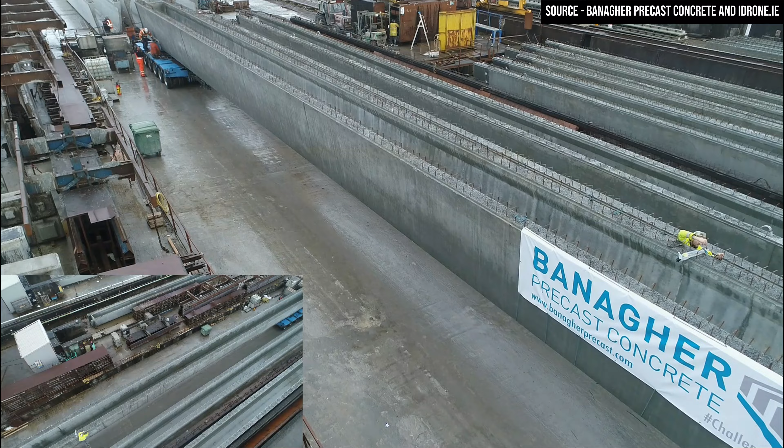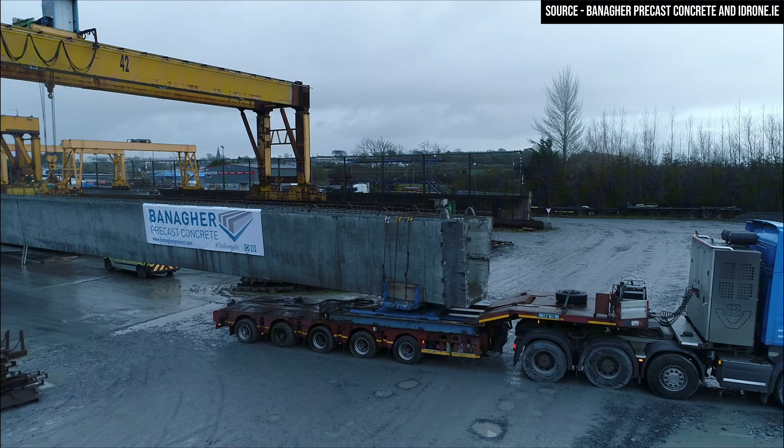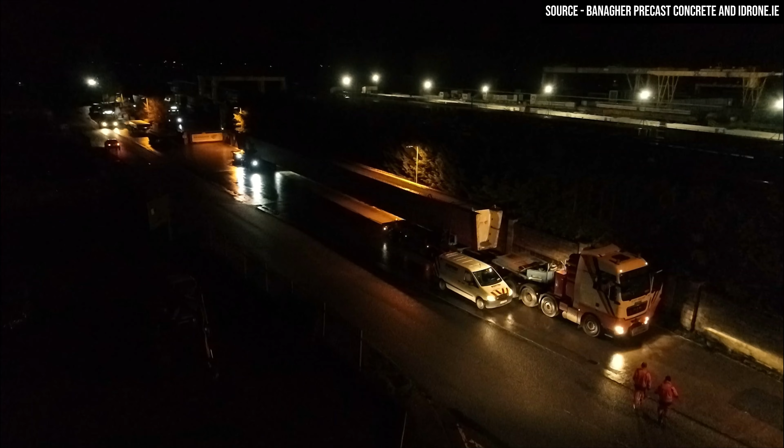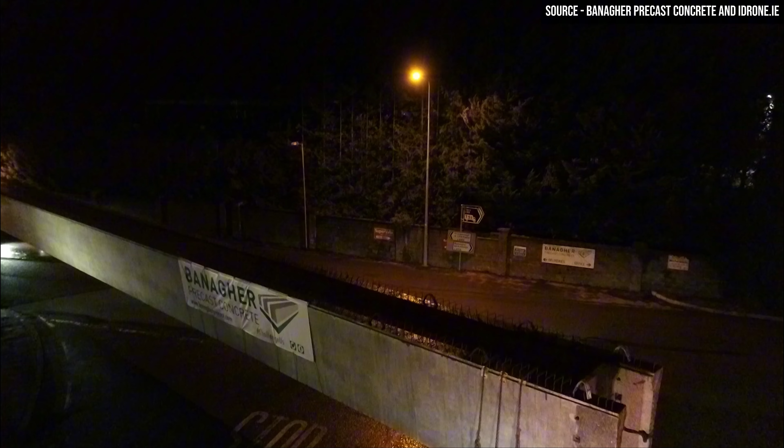We have Precast Concrete Design Lifting Course episode 3 for you. Just before that starts, I'm going to show you a nice little video that the guys in Banagher were very good to give me for this course, and iDrone.ie shot the footage. So it's of the record-breaking 50-meter long bridge beams, W19s, that Banagher manufactured for the N22 Macroom bypass. The beams were manufactured for Jons Civils and John Craddock's, and they were designed in combination with JB Barry.

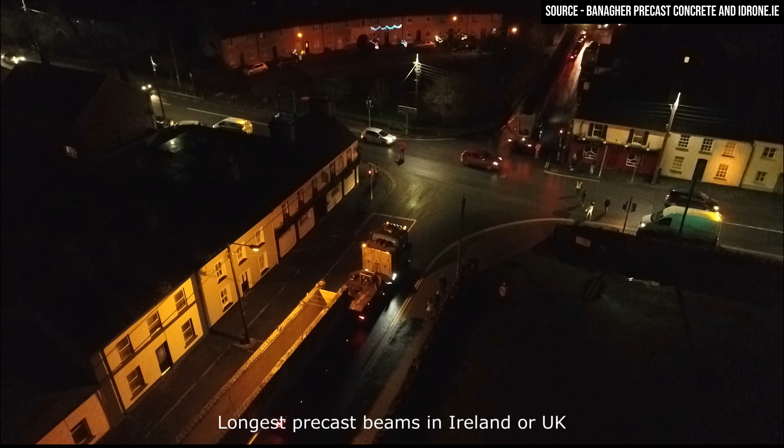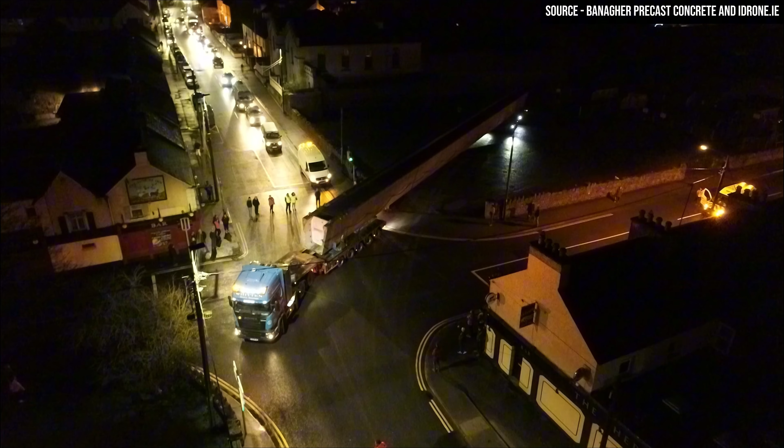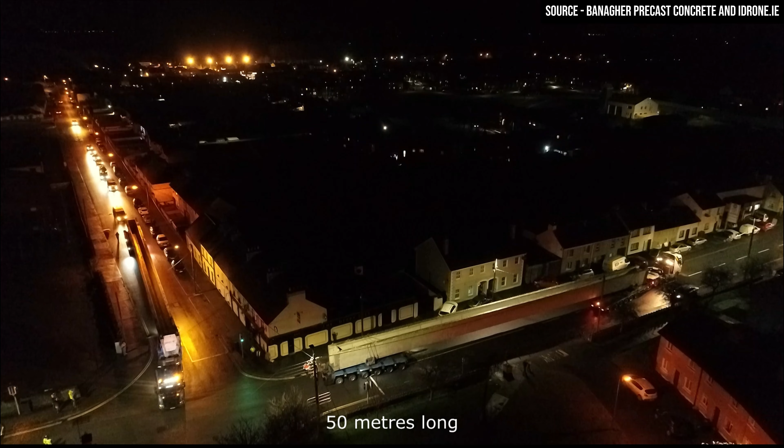They're a fantastic feat of engineering, to be fair. 50 metres long, 155 tonnes, 2.5 metres deep. There were 7 of them manufactured and installed, I think, over 2 days for this bridge. You can see here them coming up through the town of Birr, and whatever about the manufacturing of them, just the logistics and getting them to site. You can see from this footage, it's extraordinary stuff. I'm going to stop talking here and just let you watch it and enjoy it.

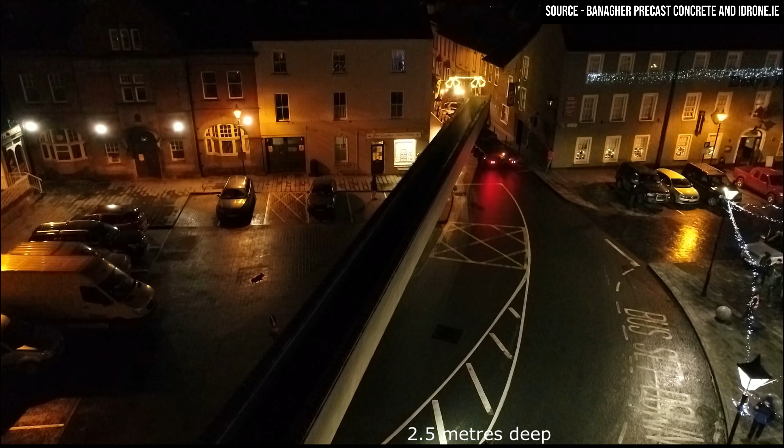So you can see here the beam just getting through Birr town, and I think the guys said that they're nearly maxed out with 50 metres, or else some of them houses, shops are going to have to come down. You can just see it squeezing through.

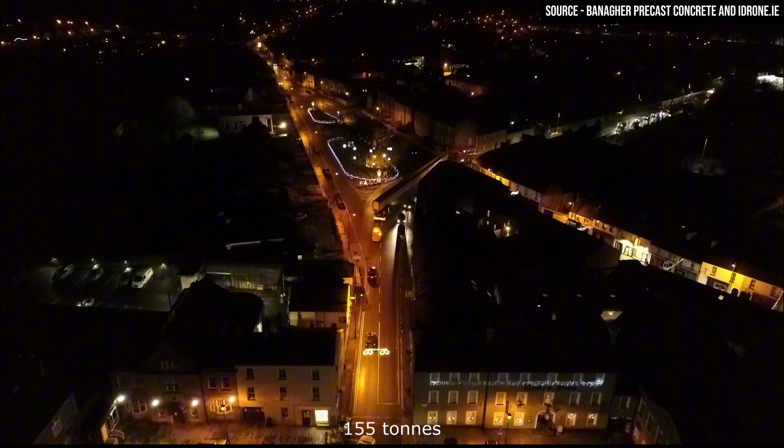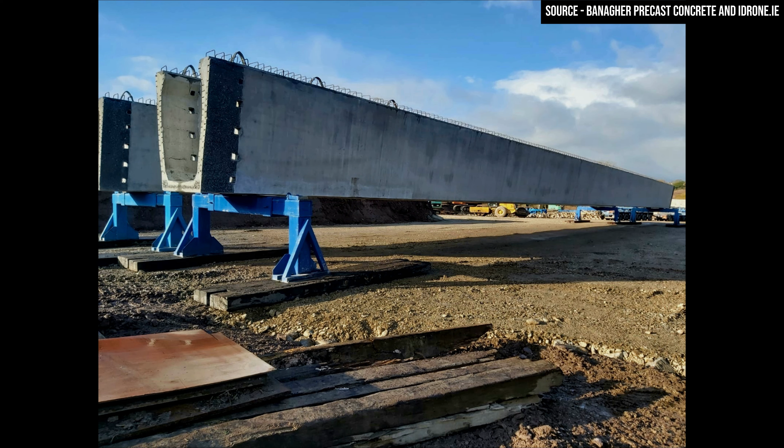So on site, you can see the beams were offloaded onto trestles, just saved on craneage. The beams could be brought down, left onto trestles, and then popped into place. The lifting itself is lifting strands, 8 number point lift. A couple of photos of the beams going in the finished bridge. Strand lifters will be discussed by Matt in next week's lecture, so one to stay tuned for.

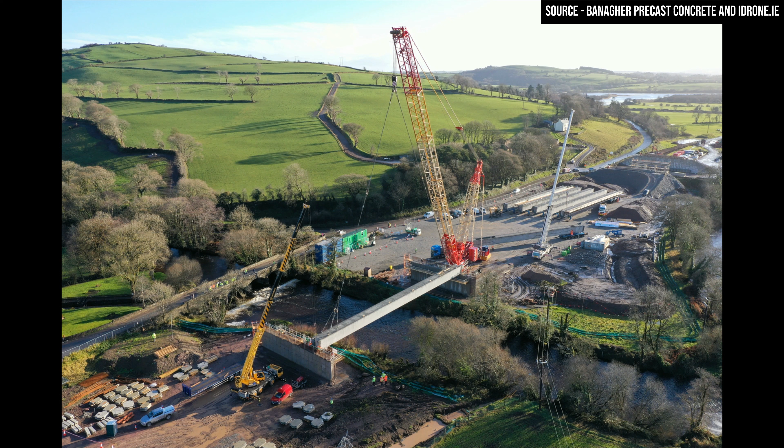So welcome to the third module, third lecture in this precast lifting course. In this module, we'll be continuing to focus on the lifting capacities and on determining the capacity of lifting pins due to shear. So last week we looked at the capacity of lifting pins due to tension, and the one before that we looked at calculating the demand. So this is probably on a par in terms of the technical side of things compared to last week. So lectures 2 and 3 are probably the most technical lectures in this course, and we're kind of at the crest of the hill here now, and the final 3 lectures are less technically intensive.

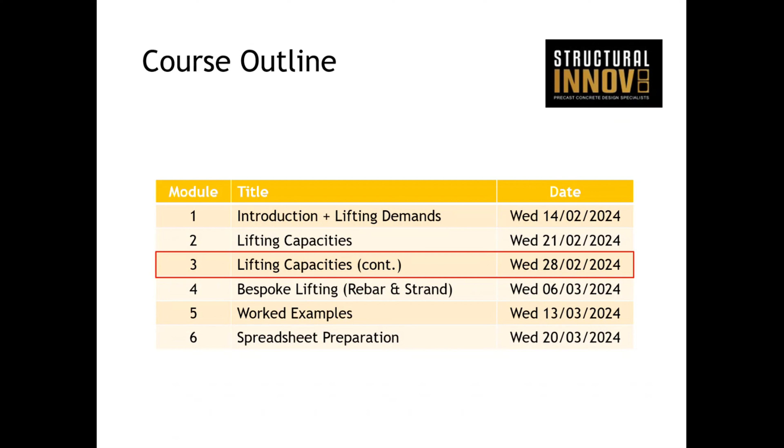Summary of the course outline. We're now moving on to the next module, which continues to focus on lifting capacities. Before getting into this, we'll have a quick recap, like we did the previous week, of last week's module, where we discussed the lifting capacities due to tension failure modes, and we'll have some questions at the end. So after our recap of last week's module, we'll continue with some technical discussions on lifting capacities in relation to shear this time. And then following that, I'll speak about how to account for situations where tension and shear act at the same time, and how to account for this interaction.

So typical slab lifting, for example, with your chain angles at 30 degrees, you're going to have tension forces and shear forces on your lifters, and the same piece of concrete is essentially trying to resist both sets of forces. So there's an interaction to be accounted for there. We'll finish up with looking at some supplementary reinforcement that you can use in order to help resist the tension and shear forces, and we'll follow that with a full worked example, basically continuing on from the simple slab that we started with in lecture 1. We'll now check that simple slab in terms of its capacity in tension and shear.

So last week we focused on capacities of lifters due to tension failure modes. We took the general capacity formula, broke it down into its individual components for each failure mode. And for steel failures, we showed that the rated capacity of the lifter that you typically find in the brochures is acceptable and complies with the approach taken by the Eurocode. There are 4 concrete failure modes in tension: concrete cone failure, concrete pull-out failure, blowout failure, and concrete splitting failure. The first 3 we kind of showed formulas with quite a number of factors in it. As I said, they're all fairly well explained in the slides and in the code itself.

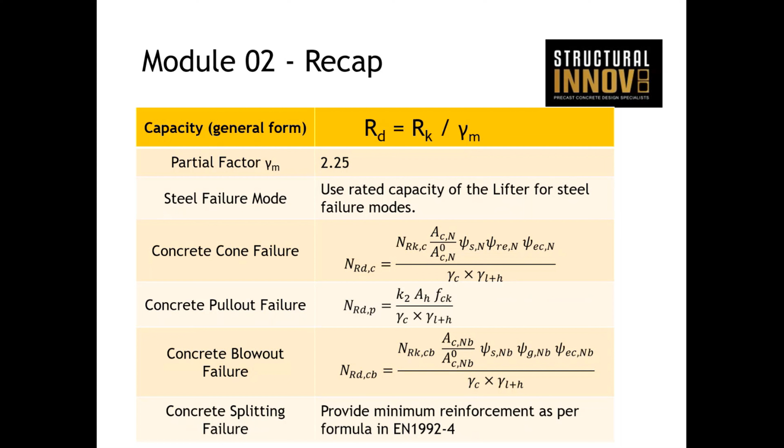And one question that was raised to me last week on that was the formula for splitting failure. So these next 2 slides are essentially from lecture 2 with an amendment. The formula for splitting failure is provided in the general Eurocode for fastenings in concrete 1992-4. And in terms of the partial safety factors, we need to ensure that when we're doing precast lifting, we include the precast lifting and handling safety factor from CEN 15728.

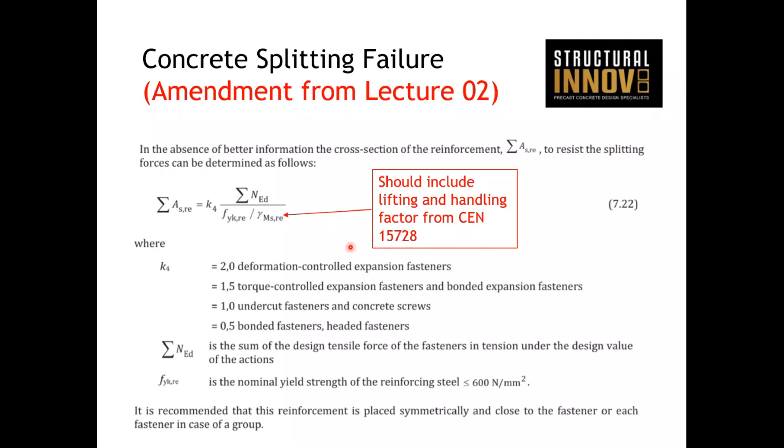Typically, the partial factor for reinforcing bar is 1.15. But then in addition to that, according to CEN 15728, we need to add in another factor, and for steel rebar, it's 1.8. And that essentially is to conform with the older way of designing with a global factor of safety of between 2.5 to 3. So the second slide then is a revision of the formula that we presented and the values.

So in this gamma SRE, that's your reinforcement partial material factor, and that has 2 components in terms of lifting design. It's got your 1.15 for the material, and you've got your 1.8 for the lifting and handling, and that gives you a total value of 2.07. So it increases the amount of steel required to resist splitting. And in this particular scenario, where we looked at a 32-ton lifter, the biggest in the range, you need 662 millimeters squared, which is the equivalent of about 6 B12s centered around the lifter uniformly.

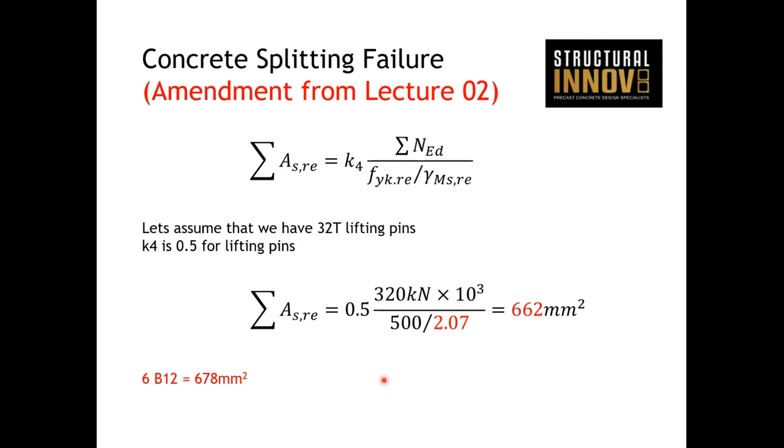So again, it's not a huge increase. Last week, I think we said we needed 4. Now it goes to 6. And this is for the biggest lifter in the catalog. So again, it's not a huge amount of reinforcement. Generally, if you're using the biggest lifter in the catalog, it's a big unit, which probably has a large amount of steel in there anyway, and you can rely on that steel for this check. So generally, this check is always going to be satisfied still.

In terms of lifting pins, I've just put the slide up again. I've showed this slide every week now. So again, we've got the forged foot that gets cast into the concrete. The foot is the primary load transfer mechanism for tension forces. And for the shear forces, which we're talking about this week, direct contact is typically made between the clutch in the dome and bears against the concrete there.

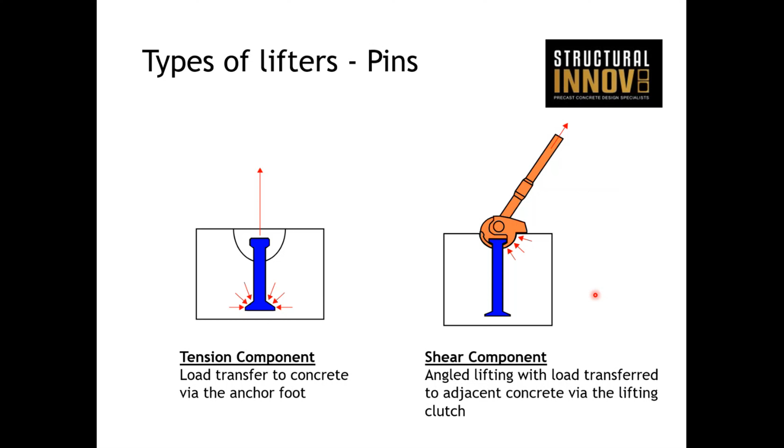It's probably quite difficult to theoretically put a number to exactly what's going on in this area. So we bring everything back to what the actual lifter is doing in terms of shear. So is the area of concrete in contact with the lifter sufficient? Is the steel section of the lifter sufficient? And that approach is applicable to all types of lifting components in shear.

When we look at shear failure modes, we take the same approach. So we check the steel failure modes, which is essentially the shear failure of the head or the pin of the socket. See here on the left, these two examples where the head can shear off or the socket can shear off. When it comes to lifting pins, it's generally the shank diameter that's the most critical.

When it comes to sockets, what you will find is that in nearly all circumstances, when you've got, for example, a wavy tail, when you check the shear through all the components, through the actual socket portion, through the rebar portion, it's the actual rebar portion that governs. So as a rule of thumb, it's always good to use the diameter of the rebar in your design capacity formulas.

So we've got 3 concrete failure modes then to be considered. We've got pry-out failure mode, which can be seen here, and comes from the calculations when we get into them. It's similar to half a concrete cone failure that we would have seen last week. The next one, and probably the one that governs the most, is concrete edge failure.

So we've got a couple of examples of concrete edge failure here in a wall. Down here in the bottom left, we've got examples of an edge failure in a slab. And actually this one here on the very left is an example of tilting a panel. So you get edge failure when you're trying to tilt that panel.

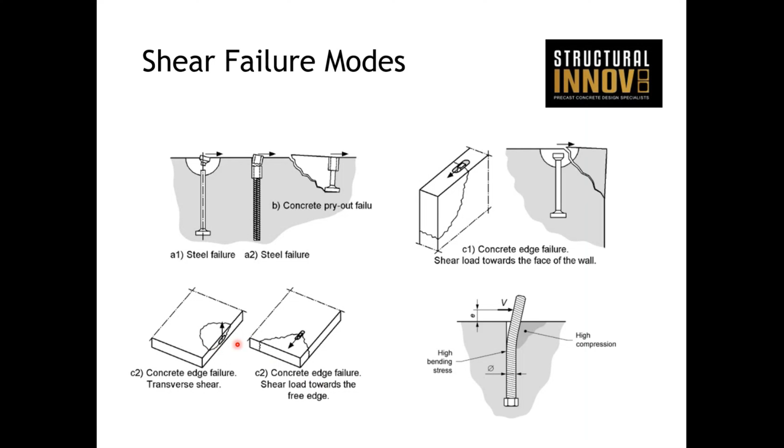When you're tilting, you should always add in additional reinforcement around your lifter for tilting, and a number of different brochures will have different scenarios, but it's essentially some form of a cranked U-bar similar to that which gets wrapped around in hard contact with the lifter. So we'll go through the explicit formula to how you can actually work that out a little bit later on.

So for concrete edge failure, I'm going to take a similar approach like I did last week. I'm not going to explain every single factor in these formulas. I'll cover the main ones and try and explain how the concrete or the pin behaves when it comes to these different failure modes in diagrams and stuff like that. So let's try to keep it less theoretical, less numbers, and just get the concepts across.

So for concrete edge failure, when we look at the diagrams, we can see that the failure line propagates at an angle of about 35 degrees, similar to concrete cone failure last week. We can generate an equivalent rectangle breakout area. So it's the top surface coming out to the side edge here, and it's 1.5 times your edge distance. It's similar to what we had last week. So in order to have the full area of concrete available, we need to have concrete 1.5 times the edge distance to the left, to the right, and into the concrete.

This image here on the right, this side section, explains this wedge of concrete. So your shear force is being applied at or very close to the surface from your lifting device, and therefore your first point of contact or your highest concentration of force is at the surface, and it's going to try and pop off this wedge of concrete if the concrete doesn't have enough strength.

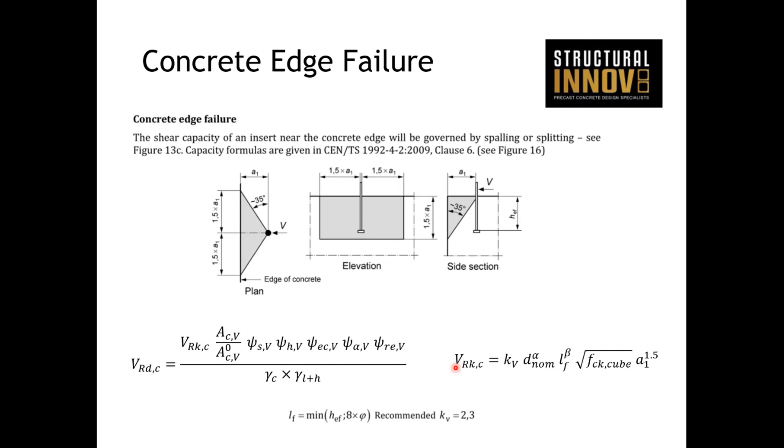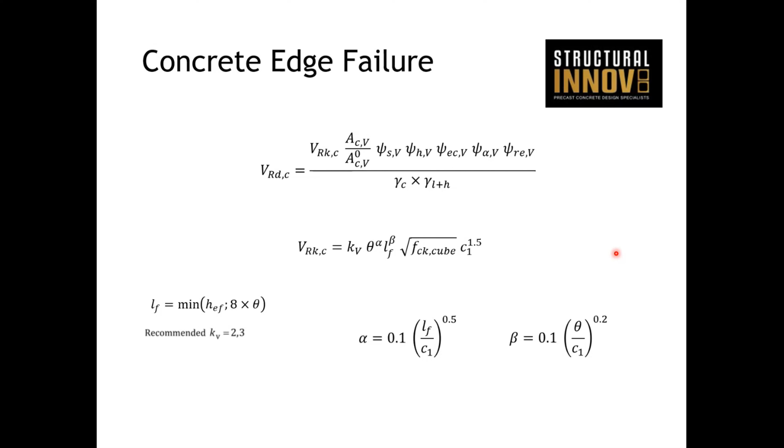And you can see, look, obviously it makes sense. If you increase your concrete strength, you get more out of it. If you increase the diameter of the bar, you get more out of it. If you increase the embedment depth, you get more out of it as well. So it's always good to just revise what's causing the issue and where it can be improved.

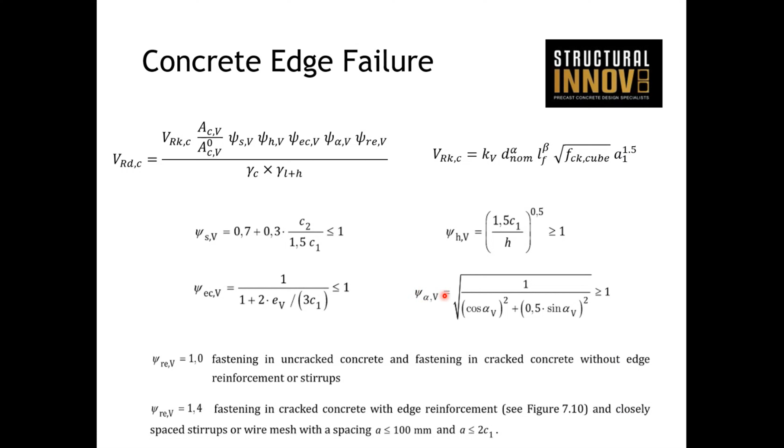And then we've got the fifth one here, which is the reinforcement psi factor. It depends on what assumptions have been made, whether it's cracked or uncracked concrete, and with cracked concrete, we'd generally always have edge reinforcement in there. So it gives a little criteria there on what edge reinforcement is applicable. But you can see there's a little enhancement there when you do have edge reinforcement that you can avail of once you comply with the requirements of the code. So on the next slide, I'm just going to talk briefly about this alpha factor.

So as I mentioned at the start of this failure mode, we take C1 into account, which is the distance between your lifting pin and the edge in the direction of the force. Depending on what kind of unit you're trying to lift, this wouldn't be the typical situation where your shear force is pushing directly towards the edge. It might be the case, for example, when you're tilting,

or it might be the case if you've got a manhole slab with an internal opening, and therefore the shear force is pushing towards that internal opening. More often than not, in the case of a flat slab, your shear force is away from the edge. So if you've got a flat slab, and let's say this is one of 4 lifting points coming back to the center, your shear force is generally pulling away from the edges, pulling away from the corners.

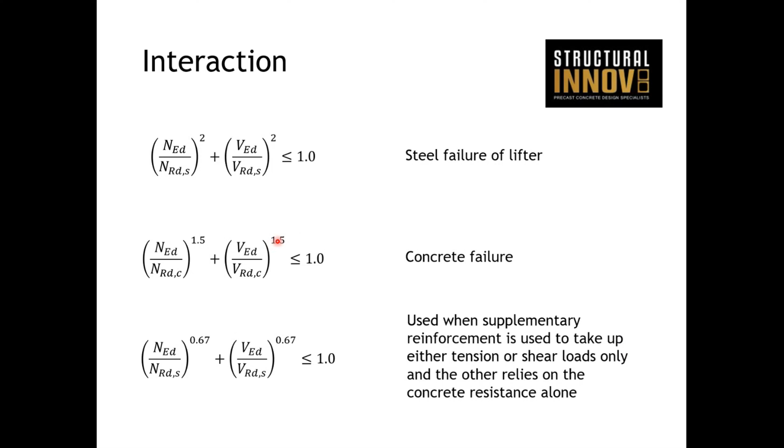These next 2 or 3 slides, I'm going to briefly touch on supplementary reinforcement. So if the checks on the previous slide are not satisfied, there are a number of options available to the designer. Obviously, you can look at the concrete strength, the geometry, the placement of the lifter, etc. But we can also add extra reinforcement to supplement the failure modes.

So in general, the concrete strength, the lifter position, the sequence of lifting can all be investigated. The demands and associated factors can be revisited. Are we using too high a factor? Is the weight overly conservative? Often, if you have a whole series of products that you're trying to do a design for, you pick the heaviest one and you design for the worst case. Sometimes there might be provisions to do 2 or 3 different lifting designs just to break it up a bit and to be a bit more efficient. But obviously that comes with its own practical issues as well.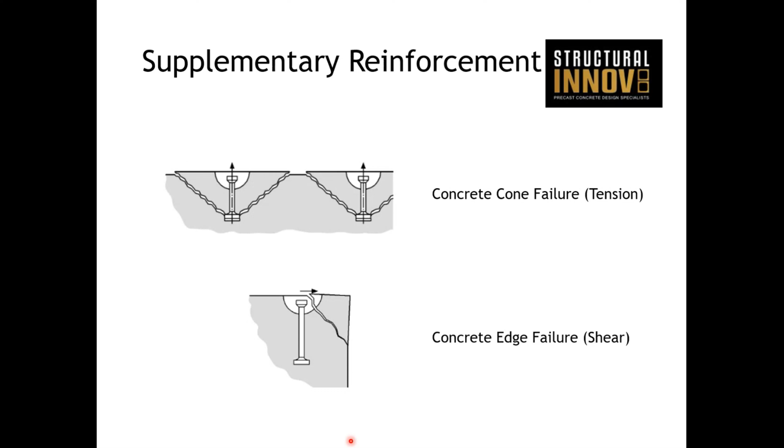So we're going to discuss here 2 supplementary solutions. Concrete cone failure for tension: how can we improve the capacity if we have a concrete cone failure issue? And then in shear, it's the concrete edge failure. The 2 most common ones, basically. So in the code, we're given a formula like this. From the diagram, basically you're adding steel to hold back the wedge of concrete that's trying to break out due to concrete cone failure.

So typically it's going to be a series of U-bars that straddle the failure line, and you make sure you have enough anchorage both sides of the failure line. In this example, probably the most common one is wall panels, because you're going to be severely crucified in terms of your edge distance when you do your concrete cone failure checks, and that's why this supplementary reinforcement can come in handy. It's based on a strut and tie approach, and it gives limitations on what amount of steel you can avail of.

So there's a little clause in here. If you have your effective depth, you can only engage the steel that's within 0.75 times the effective depth to the left and to the right. So if your effective depth is 200 millimeters, then you can only engage the steel that's 150 millimeters either side. So you might have to closely pack some of those U-bars. Often with a wall panel, you're going to have U-bar closers in there anyway, so you might just have to add in a few additional ones to satisfy the check.

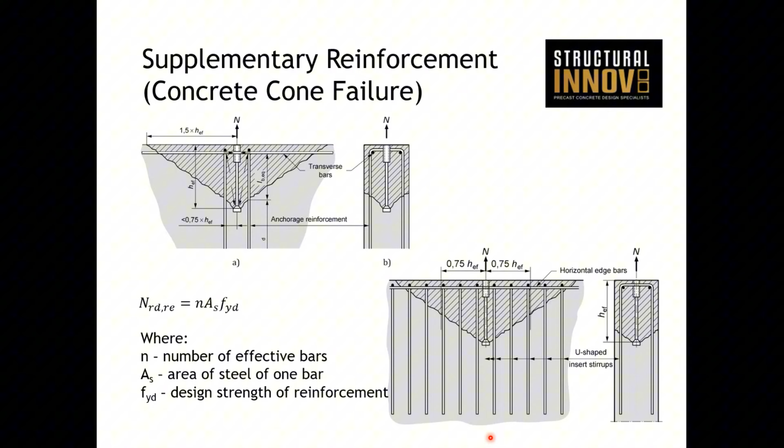The best way to do that is just assume that your failure line is at the bottom of your spherical head, the horizontal line here. That's the point at which you need to ensure that you're fully anchored. So if your anchorage is 500 mil, it's whatever your effective depth is plus full anchorage. So if your effective depth was 200, 200 plus 500, 700 is your leg length required for those U-bars.

A very similar approach can be carried out for edge failure. It follows similar principles. This diagram on the left is a similar strut and tie approach, where you've got your shear force, U-bars wrapping around, and your transverse bars as well. And your U-bars have the same criteria of 0.75 times your edge distance in this case. When it was tension, it was the effective depth. So if your distance to the edge is 200 mil, then this is going to be 150. So they're the bars that you can engage for that effect.

Exact same principles in terms of the anchorage length and all that. And your formula here is the exact same, because your U-bars are still acting in tension, the legs are still in tension. One interesting thing to note here is this K10 factor.

And this K10 factor is known as an efficiency factor. So how efficient are the bars engaged? And the reason that's there is because of the diagrams here on the right-hand side, that when we're dealing with shear, for tilting, for edge distance, etc., often the common case is to put U-bars hard against the lifter to hold it back. And due to the bend radius, the radius of the lifter, the contact area is quite small, and there's always going to be a bit of concrete in there. So the efficiency factor is put in place to ensure that a safe design still exists.

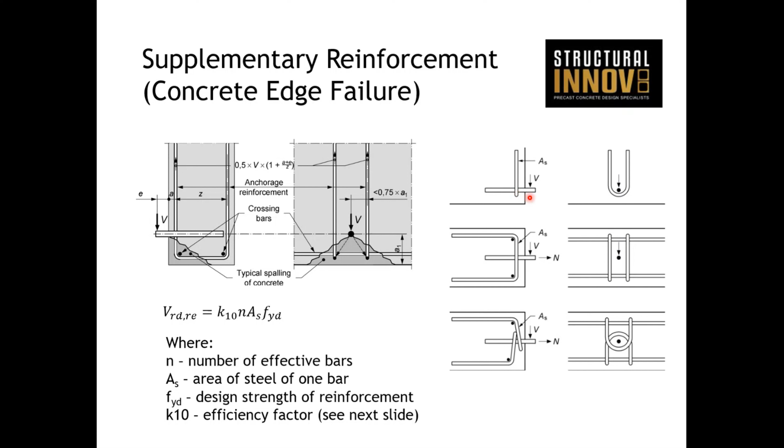So essentially, when you're dealing with supplementary reinforcement with kind of a strut and tie approach, your efficiency factor is 1. But when you're dealing with any other where steel is in hard contact, your efficiency factor is actually 0.5. So these are the examples given here where K10 is 1. So you've got kind of a strut and tie approach, and where K10 then is 0.5 is when you've got your steel hard in contact with U-bars, etc.

And it's just because, you know, how good is that contact? Is there bits of aggregate? Is there a little air pocket just because of the different bend radiuses, bits of aggregate getting trapped in there? And it's kind of shown that there is a reduction when tests are carried out, that you can't really avail of the full amount of steel that you put in just because of that contact area not being perfect, and therefore a little bit of movement happens, and you only need a little bit of movement to happen for the concrete to start crushing and for things to move.

So on the bottom is an example of the tilting reinforcement. Some examples there where you have a kind of a cranked U-bar in, I suppose, parallel to the surface. You have other ones here where you kind of crank it in such a way that it goes down the edge of the wall. And I suppose the only comment that I'd have on this is possibly to always double it up. Typically, if you don't know which way the wall panel is going to be tilted, you only need a U-bar in the direction to pull back the shear force.

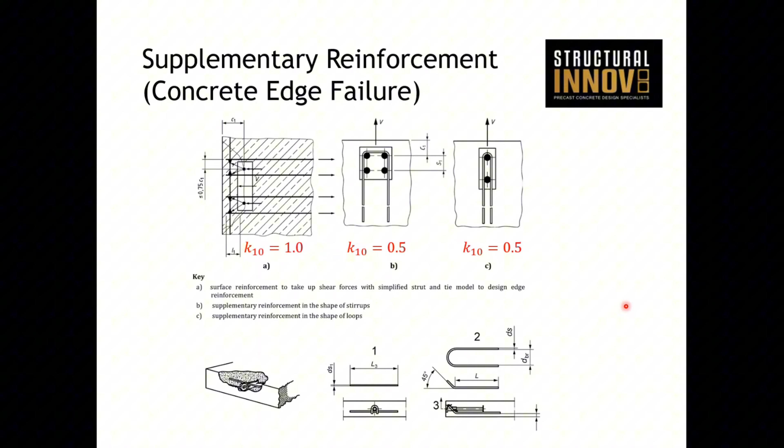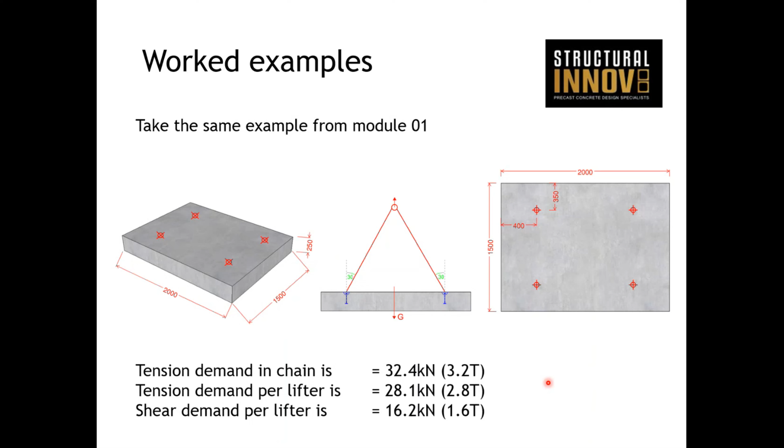I won't get around to it all, but I'll spend a couple of minutes just going through it. The rest of the slides in this lecture are basically the worked example, continuing on from the example we started in the first module where we calculated the demands. It was a simple flat slab, geometry shown here, position of lifters shown, and these are the demands that we brought forward from the first lecture. So essentially, you just need to go down through the list of failure modes that need to be checked. So once you have your demand in your lifter, you can select a suitable lifting pin.

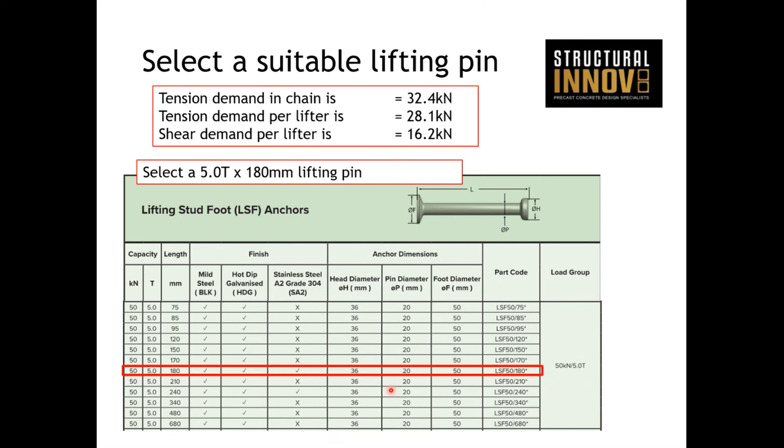So from here, we had a tension demand in the lifter of 28.1, tension demand in chain of 32.4. So you're going to be looking at a 5-ton lifter for that. Select a suitable pin. Work out what the depth of it is going to be. What did we say our slab was here? It was 250 thick.

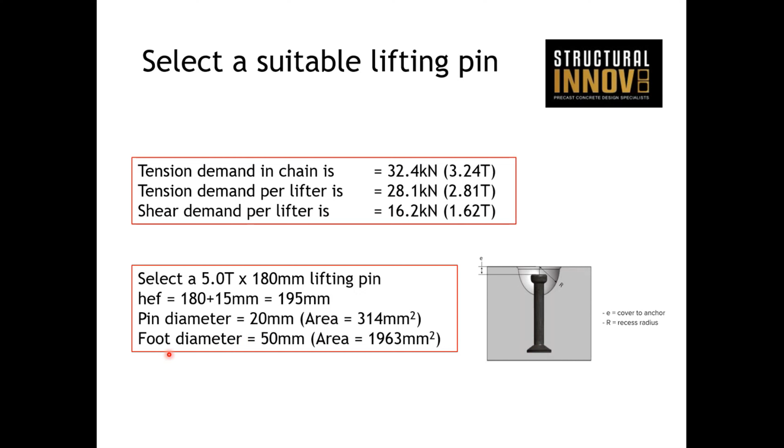So what we have is a 180mm long lifting pin, but then because of the dome former, there's going to be this extra bit of cover here. So I think for a 5-ton, that's 15mm. So the bottom of your lifter is actually 195mm from the top. So that gives you 55mm of cover to the bottom, which is probably satisfactory. Work out your pin diameter and foot diameter because we'll need those later.

So you've got a wall panel, you've got your lifting pin coming up here like that, and blowout failure can occur something like that where you're close to the side edge and that blows out. So there's a little clause in there, so we can ignore this failure mode if the edge distance is not less than half the embedment. So in this particular example, I think our edge distance was 350 and half the embedment was 97.5, so nearly 100mm. So the 350 is not less than 100, and therefore you don't need to check that.

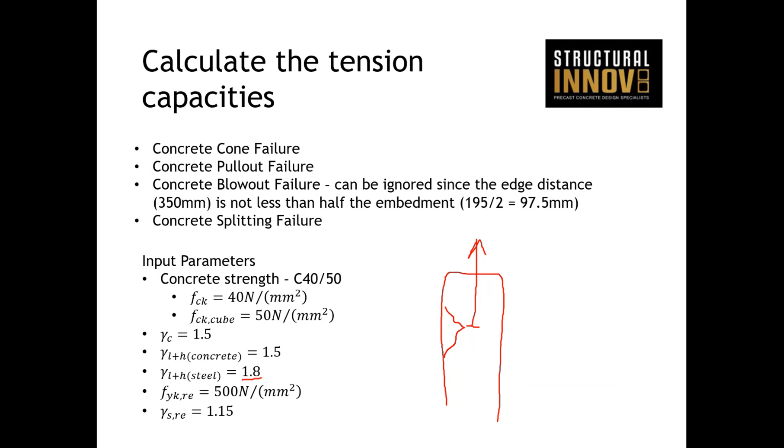Pull together all your inputs, your concrete strength you're using, your partial factors, have those all on the side of your page, so you can always refer to them. And again, these lifting and handling factors always need to be accounted for. Anything else worth noting here?

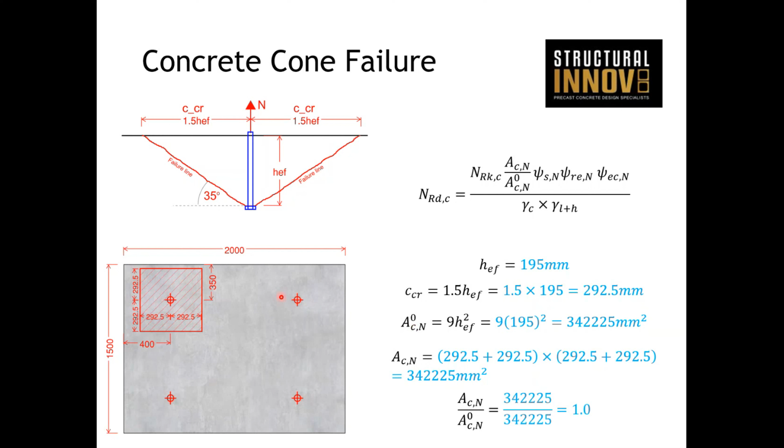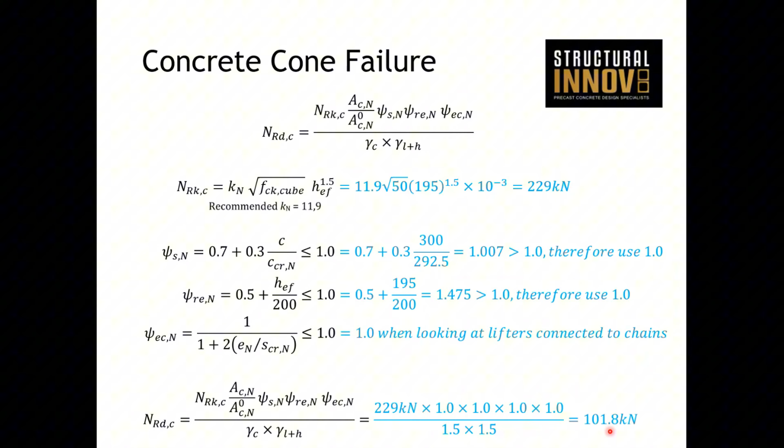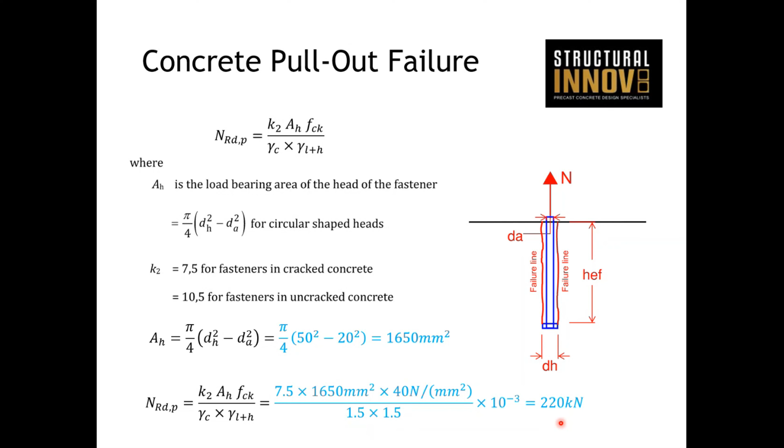Yeah, so this is essentially just repeating the slides that we would have shown already, but then in blue, I've added the actual numbers for this particular worked example. So you can follow through the whole design for this, working out how the area comes together, all these other factors that we only briefly discussed. For concrete cone, we came up with a value of 101 kilonewtons for that. Concrete pull-out failure, again, like I said, you'll always find that this rarely governs. When you work through the numbers, you get 220 kilonewtons.

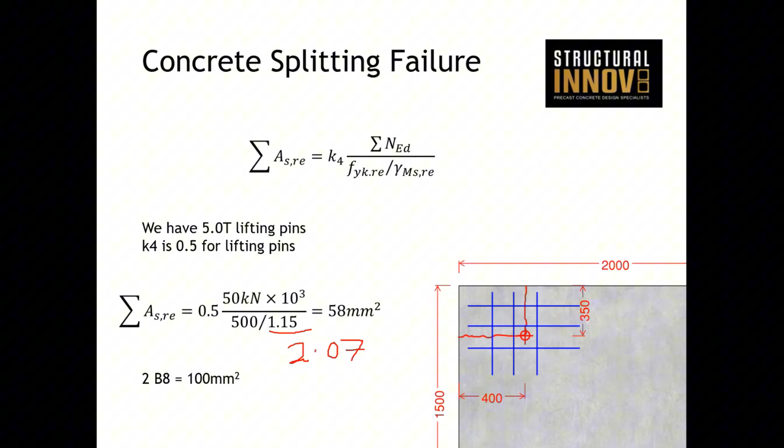Concrete splitting failure, we can work out what the reinforcement is, and again, it's not shown here, but that should be 2.07, like we discussed at the start of this lecture. But you can see in this particular example, there's a 5-ton lifter, so you actually need 2 B8s. So you're more than likely going to have more than that in the vicinity of the lifter anyway. So again, this failure mode rarely governs.

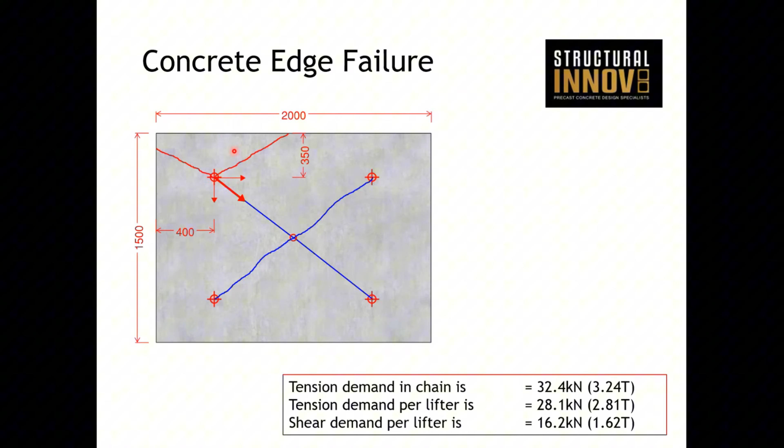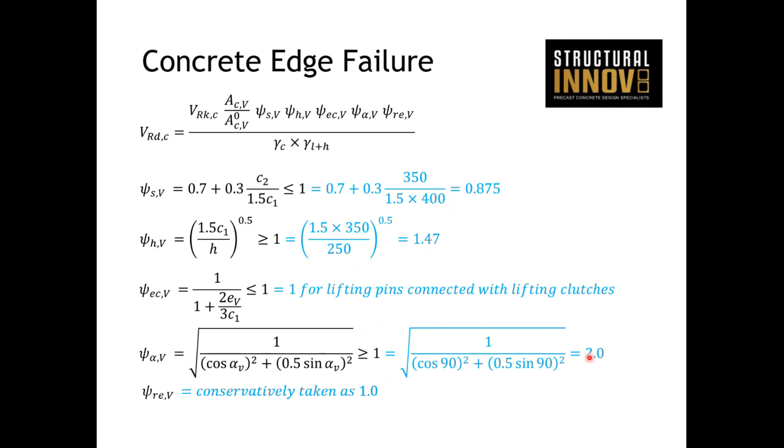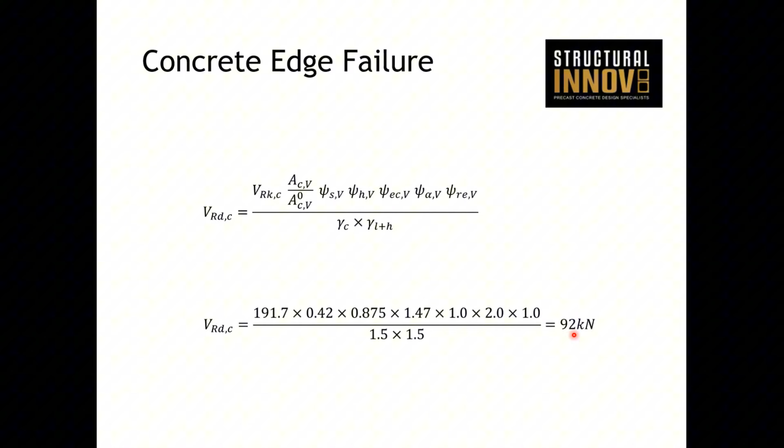Concrete edge failure, so we move on to shear failure modes then, and you can see here where I was explaining that you've got the component of shear parallel to the edge. So you're typically pulling away from the edges, but there's going to be a component parallel to the edge, so you can utilize that factor of 2 when you get to the factors. So when we get to this, we've got this factor of 2 that we can avail of. So when you crunch all these numbers, you can put them all into your final formula for shear edge failure, and you get 92 kilonewtons in shear.

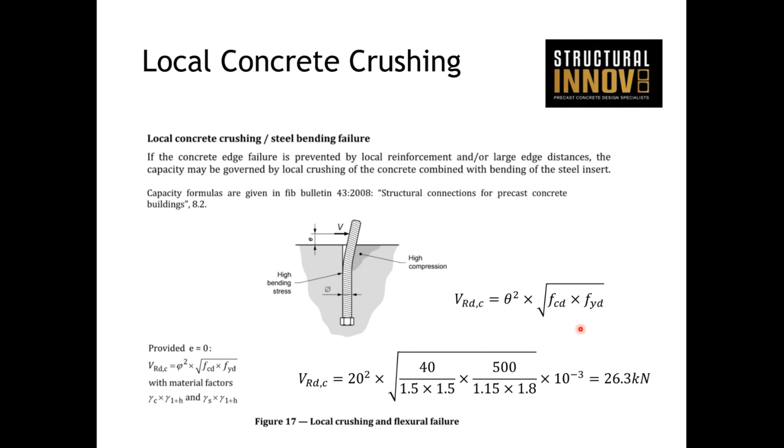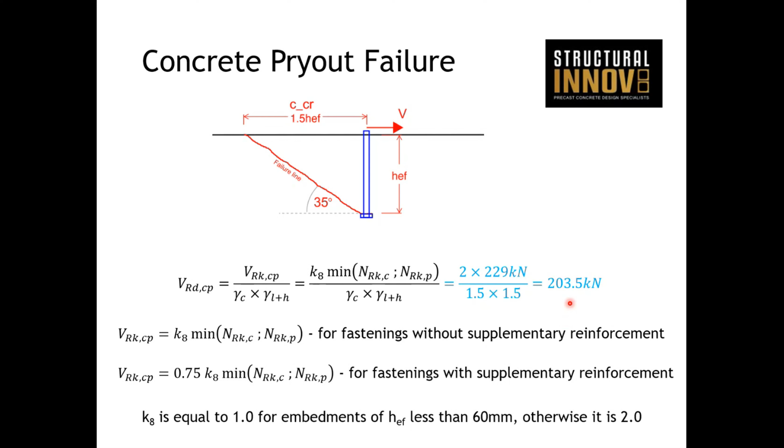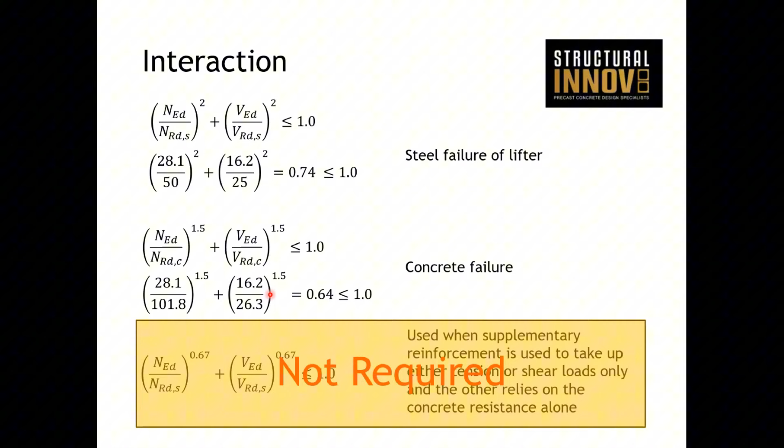Concrete crushing, again, a simple formula. This one seems to govern quite a bit, 26.3 kilonewtons. And pry-out failure, again, pulling from the minimum of our concrete cone and pull-out, we get 2 times the 229 divided by your partial factors, you get 203. And then the last thing to do is check your interaction formulas. So because we weren't utilizing supplementary reinforcement, we didn't need to use this formula down here. So we just need to use the steel interaction check and the concrete interaction check.

And then finally, I have the slide which summarizes all the values that have been used in lectures 1, 2, and 3 for this particular worked example. And you can see here, we can work down through our tension failure modes and shear failure modes for the steel lifting pin, 56 and 65, and then our interaction is 74. And then our concrete cone failure modes, 28, 62, and then your interaction is 64.

Generally, what you might find for typical slabs is that the pin might be the governing failure, so the steel. So you can see here that's the highest utilized, 74. But when you're dealing with walls or units with openings, it's generally going to be the concrete. So when you have no issues with edge distance, you can generally utilize the full capacity of the concrete, and therefore the steel will be the failure mode. But when you have any disturbances, you're generally going to be caught with the concrete failure modes.

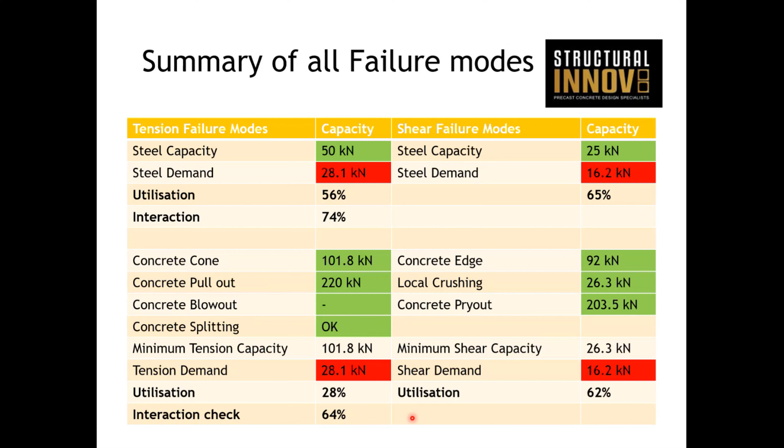So I think in lecture 5, the intent is to go through a couple of examples. So lecture 5 is purely going to be worked examples. I know I went through this one fast. I was conscious of time, but in 2 weeks' time we'll go through a few more worked examples, a bit slower, so it'll be easier. And also, this was probably a bit too simple of a worked example, so we'll do a few more to do with tilting and stuff like that in 2 weeks' time. Next week we're going to diverge from these lifting pins, and we're going to look at strand and rebar lifters. So we'll call it there,